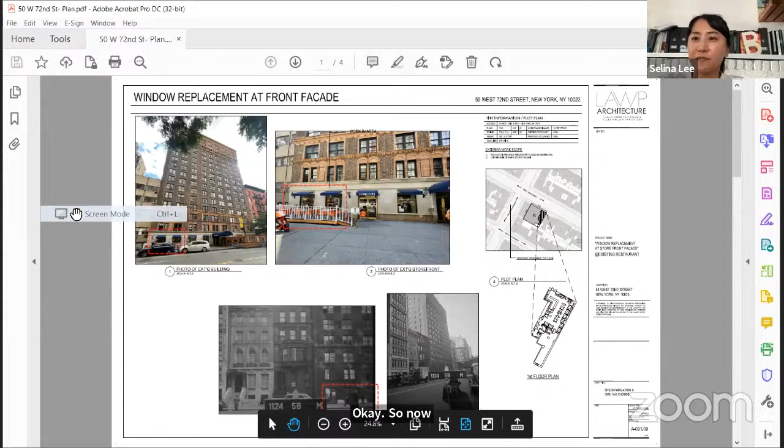So now I'm in control of the drawings. Shall we start? Please. Okay, greetings, dear board members. I am Selina, an architect for the proposed storefront windows at the restaurant on 50 West 72nd Street. The cross street is between Columbus Avenue and Central Park West. It's an honor for me to address you, and on behalf of my colleagues, we are pleased to present a new window design to the Upper West Side.

So please take a look at the entire first page. Could you go to the first page? So when you take a look at the entire building facade, as you can see from the red dotted line, our work scope is the left two windows. These are currently fixed windows, and we would like to replace them with double hung, 4x4 double hung windows.

So could you go to the second page of the drawings? Is there a restaurant there now? Yes, it is open, and you are running the business, but we would like to change the current fixed windows with the double hung windows. So could you take a look at the first drawing, the 1940s tax photo on the first page?

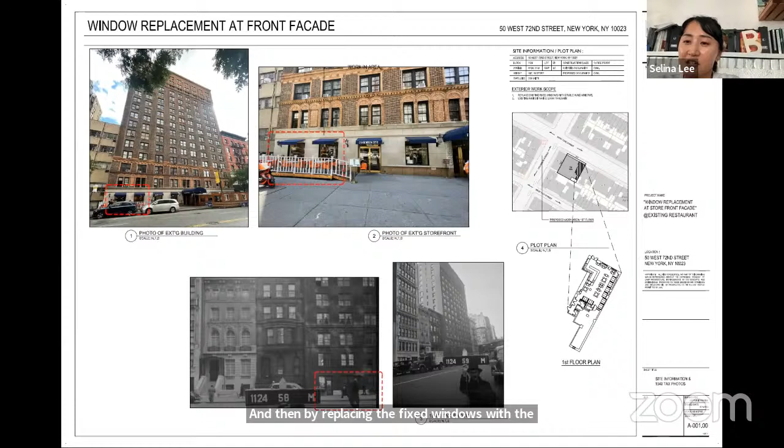Seems very straightforward. By replacing the fixed windows with operational windows, we can make this restaurant more congenial, like a semi-public space, because people can make eye contact. It also improves indoor air quality through natural ventilation. So the 4x4 double hung window we are installing will match the existing 4x4 double hung windows in the building above. It's the same style exactly.

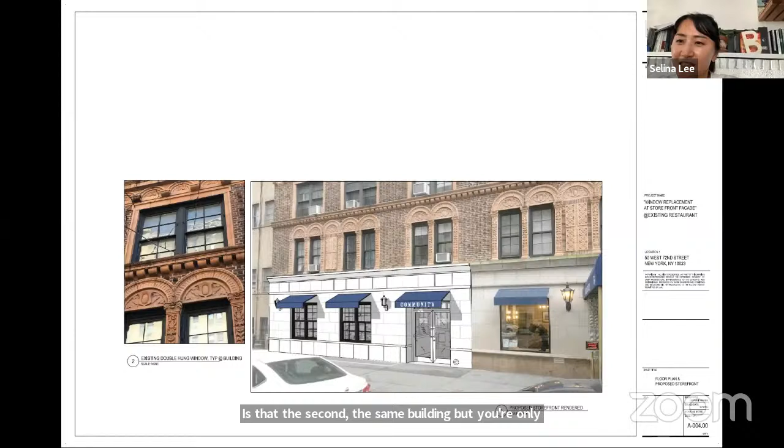Pat, you have a question? My question is, it's just the two windows and the rest of the windows on that floor are not included? Is that the same building, but you're only doing two of the windows and leaving the other? Only our restaurant's. Because the only two windows belong to our restaurant.

Any other board member questions? No, seems like an easy one. Basically we would be making a relatively simple change to return one aspect of the building to what it was originally, and improve the customer experience. So why not?

Jay, do you have anything to say about this, or a question? I agree that it's relatively simple. They're bringing back the windows to be historically accurate. I can't imagine any reason to oppose it, and not to prevent anybody else from commenting, but I would call the question.

We should just see whether anybody from the public has anything to say. But otherwise, I think we've got an easy one here. Any members of the public? If you're a member of the public and you want to speak, please raise your digital hand there. Michelle, I'm not seeing any. Don't see anybody.

All right, so we will take the vote on this resolution to approve a certificate of appropriateness to replace the existing fixed pane windows at this location and this restaurant with 4/4 double hung windows, in effect returning the windows to the original condition they were in, pursuant to the 1940s tax map.

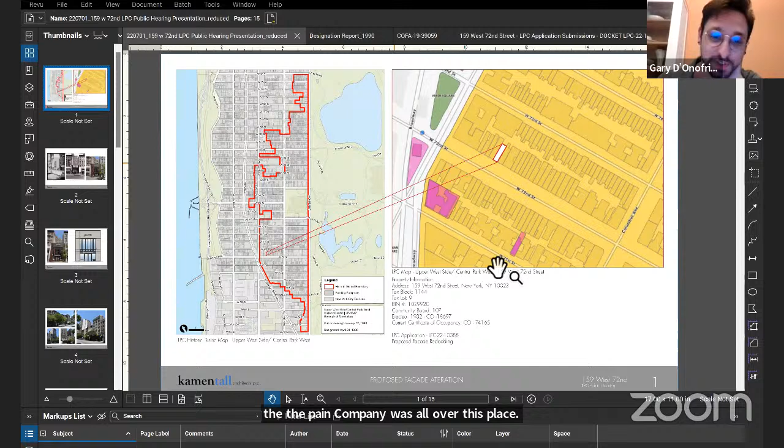Now we're going to be talking about the tiles. Because you had a big, the paint company was all over this place, yeah. Yes, I'll go through more of the pictures so you can see what it looked like through time. So this, sorry, go ahead. No, go ahead if you need to. It's your application.

All right, we're located between Columbus Avenue and Amsterdam Avenue in the district. And this is what we looked like through time.

In 1940, very different look from what was designated. It was an Art Deco building known as Provident Loan Society. Then sometime in the 80s or 70s, I'm not quite sure, they went through a huge overhaul renovation here, and it looks like what it looks like today. They used clay glazed masonry tiles and a huge storefront window, which is still around to this day.

In the previous application, they removed the old sign and wanted to replace all the tiles that were supposedly behind here, but there were no tiles, and those tiles no longer exist. That's why this looks like this today. There's currently no one manufacturing these glazed tiles or any tiles that look like this.

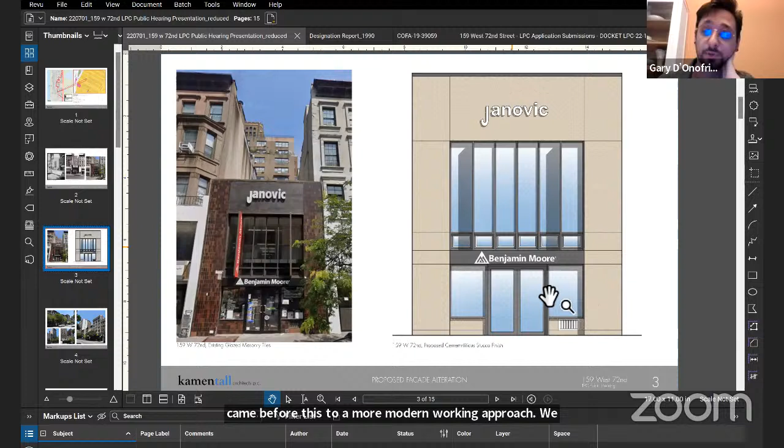So what we are proposing is to try and marry what came before this to a more modern looking approach. We are proposing to remove the tiles and replace it with a cementitious stucco finish. We're going to keep the existing storefront in place, as well as the existing approved signage. I believe it kind of fits in with the neighborhood, which I'll get into.

The whole street is kind of eclectic in style, some very ornate buildings and some very simple buildings, as you can see. I believe it fits in if we stucco the building, as the adjacent buildings, 161 and 163, both have an EIFS stucco finish and a regular stucco finish, respectively. This is just a map.

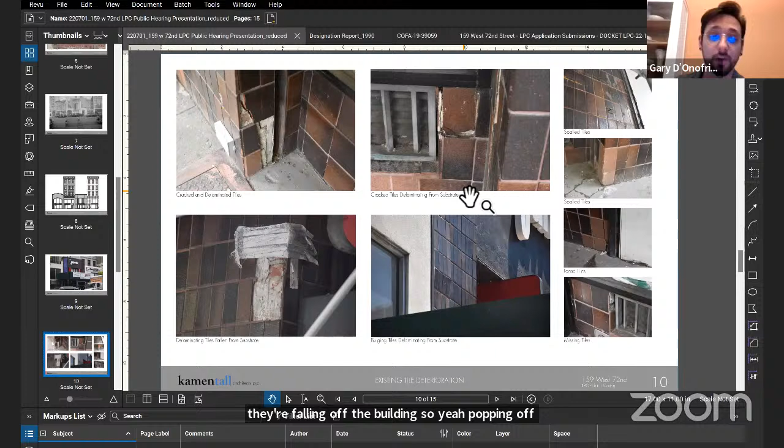The reason why we want to remove the tiles is, as you can see, and I'm sure you all know, there's a shed up right now. These tiles have been degraded and they're falling off the building. They're popping off, they're starting to bulge, and they're no longer adhering to the masonry backup. We don't believe that installing different tiles will be a good enough solution. We fear that they will fall off as well.

So that's why we want to remove them and get this through quickly so that we can remove the shed. The client wishes to use stucco, as I've said, and we're trying to marry it in with the neighboring buildings and also get rid of these unsafe conditions and get rid of the shed, as it's costing the client money to keep the shed up, and it's also disrupting business. It's creating a dark environment for the store and for the neighborhood.

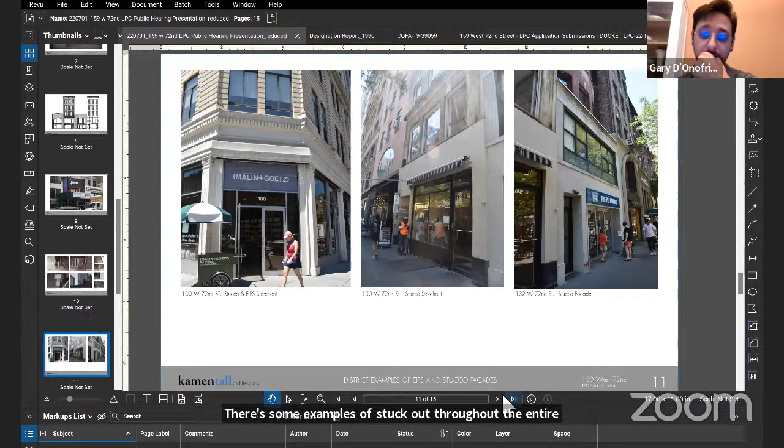There are some examples of stucco throughout the entire district. It's fairly common. If you go down Columbus Avenue and Amsterdam Avenue, as well as some stores on 72nd Street, you will find many stucco finishes.

So what we're proposing to do is remove all the tiles in their entirety, replace the metal coping at the top, and then just replace everything with a stucco finish with some joints to give it some aesthetic. That's simply what we're proposing to do. I would love to hear your thoughts.

Are you keeping the blade signs also? Yes, we're going to remove them temporarily as they were already approved by LPC, and once the building's restuccoed, we're going to put them back. This one's actually attached to the storefront, so it doesn't have to move at all.

I have a question. What is the maintenance on the stucco? Does it get painted periodically? As it gets dirty or whatever, how is it maintained over the years?

Yes, it will be painted over the years. The paint color chosen is Wheeling Neutral, an off-white beige color, which blends in with the adjacent building.

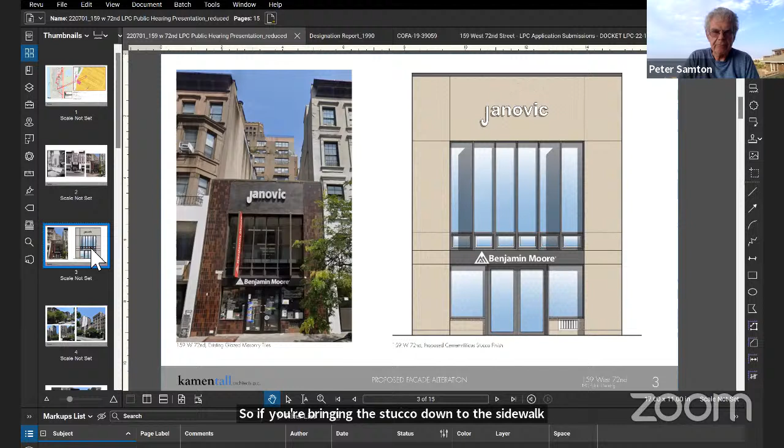Can I say something? Stucco at street level is not a very good idea because it's very easy to destroy. So bringing the stucco down to the sidewalk isn't so great. Well, EIFS is actually more damaging because it's styrofoam. We're not proposing that here. This is going to be cement, Portland cement with lime.

So it's actually much sturdier than EIFS. It's going to be adhered directly to the masonry. Yeah, but...

I've seen stucco applied on quite a few surfaces. There's one on 88th Street near Amsterdam Avenue, at the base of some public housing, put in about 5 years ago, and it's completely damaged now. People put holes right in it.

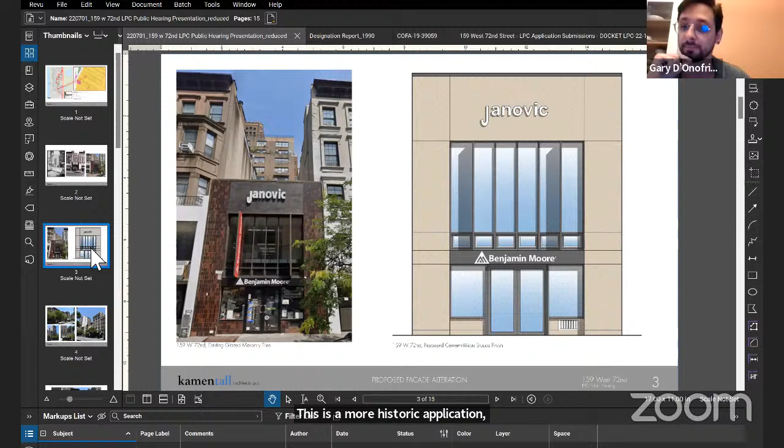They take a screwdriver or something and knock a hole right into the stucco. If there's a hole in it, it's likely EIFS, which is only about a 1/8 inch application over styrofoam. That will likely get a hole in it. This is almost an inch of cement — a more historic application. What you're referring to is the more modernized, cheaper option of stucco.

Could I jump in? On this, Michelle? Okay, thanks. I think the color is appropriate, and the closer you can get it to the other Art Deco-y looking building at 163, so much the better. I'm no big fan of stucco either, but I understand the need for it here.

Stucco often has different surface feels. Sometimes it can be almost like sandpaper, sometimes fairly smooth, almost like limestone. For an application like this, going down to street level and trying to blend in with the street, the smoother you can make it, the more it'll blend in and be appropriate. Can you comment on that?

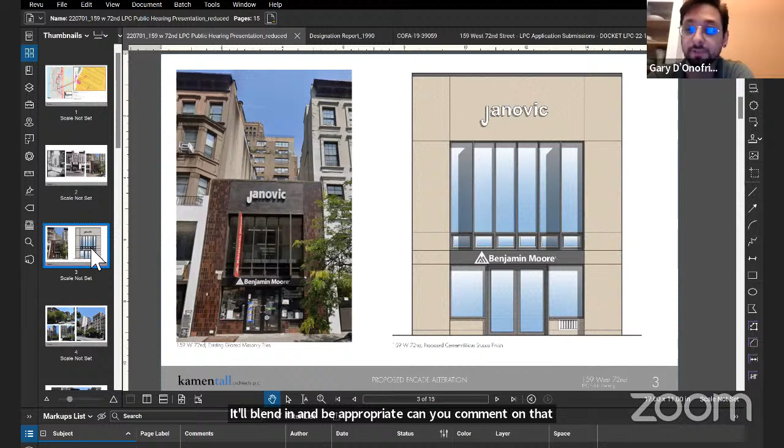Agreed. We would prefer, and the client would prefer, a smoother application as well. It would probably be easier to paint too if it were smoother. Yes. All right, they have a lot of paint. Oh yeah, they definitely know paint.

Anybody else have a question on the committee? I think we should have a resolution to approve, and we're aiming for an 8 o'clock deadline tonight too. But I want to ask, are there any non-committee board members or community members who want to pose a question? No? Okay, let's proceed. Maybe you can stop sharing the screen now.

Sure. The question is called for a resolution to approve the certificate of appropriateness to replace the current storefront with a smooth stucco.

And that's it — you're keeping the blade signs. You're keeping the sign, not removing the sign in the middle of the building. And...

All right, I'm going to ask for your vote. Kay? I'm in favor. Me as well. Jay? Yes. Thank you. Josh is not here, and Paige, you're not here yet. Mark? I'm here. I'm sorry, yes, I vote yes. Clary? Oh, yes, Sue has joined us as well. Susan has joined us. Okay. Yes, I'm a yes. Madge? Yes. Thank you. Peter? Yes. Thank you. And Sue?

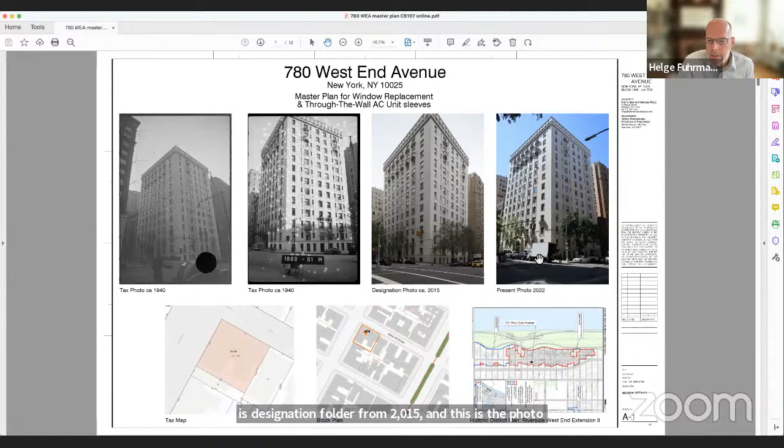This is the designation photo from 2015, and this is the photo of how it currently is. Since the designation, nothing has changed as far as I could see. Here's a closer up of the tax photo and the current conditions. You can see that currently all windows are 1/1.

Some of them are mulled together because the windows are relatively wide. So the owners decided to go with a cheaper option, mulling two together, which creates a somewhat different look. In the 1940s, you can see that the two street facades had different types of windows with muntins, divided lights. The smaller ones had just one vertical muntin, making a 2/2 window. The wider ones had two muntin locations, creating a 3/3 window, but they are still very small.

In the overall impression of the building, I think they did not stick out so much, they were barely visible. So what we are proposing—this is other views, along the 98th Street side where one can see only the side of the building barely. And this is just the corner impression with the 1/1 windows and some of the mulled together windows. Here, view up north on West End Avenue.

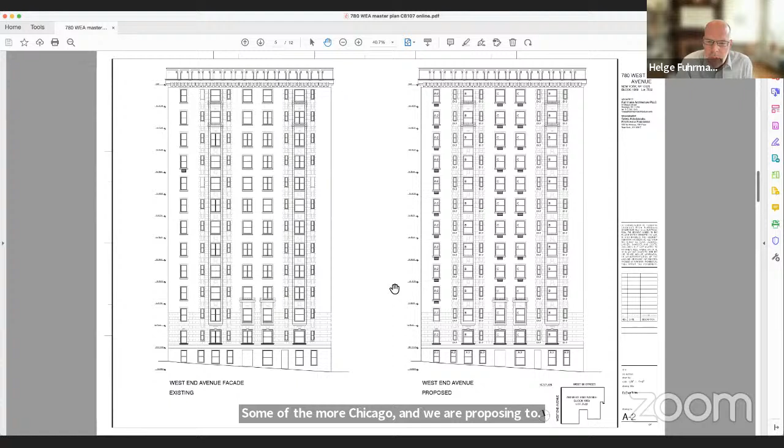So these are the West End Avenue facade as it is existing on the left. It's all 1/1 windows, some of them mulled together. We are proposing to replace them all with the master plan with 1/1 windows, all just 1/1 windows, no mulled together windows, to create a more uniform look on the West End Avenue facade. We're just clicking through the facades now. This is the 98th Street facade. Again, it will be one uniform look on the facade.

Then the same—these are the courtyard facades, where we would like to keep some of these mulled together windows. I should go back, because we're also proposing the through-the-wall AC sleeves only in locations where there's plain brick, not where there's decorative limestone around the window. On the West End Avenue facade, it's actually just three locations. On the 98th Street facade, it's only one row where we are proposing it, because on the front here, that's the corner, the window around the corner seems to be better suited for it.

This is the courtyards, again with the uniform windows and through-the-wall window sleeves. Same here, same on this facade. So this is the standard elevations of the street facade windows.

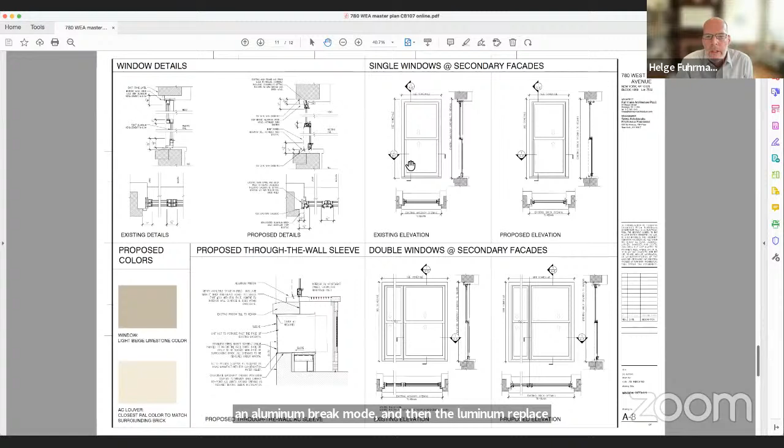I'm showing here the one historic window in the courtyard that still had the beaded brick mold. That's what we are proposing to replicate here with an aluminum brick mold, and then the aluminum replacement windows that go with it. These are just 1/1 windows in the secondary courtyard facades.

This is a detail for the through-the-wall AC sleeves. The face of the grill will be flush with the face of the brick, and the colors of the windows and of the AC sleeve will be a light limestone color, similar to the actual limestone around the windows, and then a light color also for the AC louver to match the brick.

The last page is showing historic and the current photo.

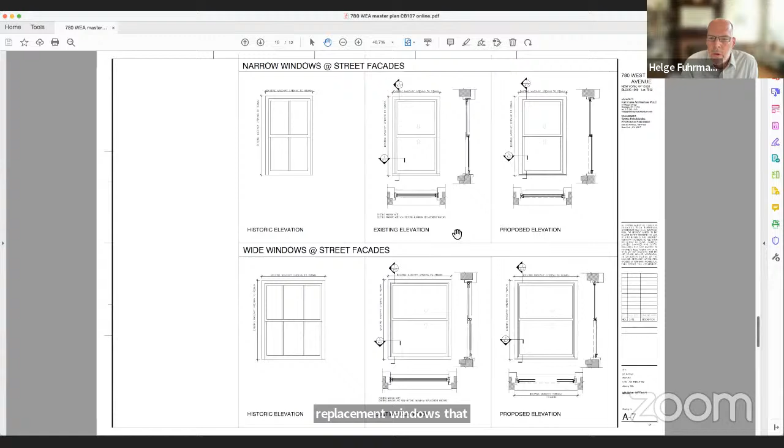Existing are all aluminum replacement windows that are currently 1/1. Some of them are also replacement aluminum windows, but they were just mulled together, two different windows in one opening. So that is a completely non-historical situation.

Just go back to the photos, so here you can see it, it's one double-hung window and another double-hung window that are mulled together. Okay, so that's my first question, are they separate windows? Yes, they are separate windows, all non-historic.

Well, okay, but the two separate windows which give the appearance of 2/2, was that the historic configuration? That's what I'm trying to figure out. No, the historic configuration for these wider windows was the 3/3 that had two vertical bars. Oh, okay, okay, thank you.

Mark, you have a question? Question and a comment too, I guess. So the existing windows are replacement aluminum, whatever the configuration, they're all currently aluminum? Yes, they're all replacement aluminum with aluminum panning. Okay.

I noticed that the proposal for the air conditioning sleeves, I'm pleased that you are not proposing to put them in the more decorated columns of windows, but they don't seem to be symmetrically arranged on either of the two primary facades. You've got them on some, but not all of the windows on West End Avenue. It doesn't go all the way down to the ground floor. And on 98th Street as well, if I remember correctly, it's just the eastern column of windows, and again doesn't go all the way down.

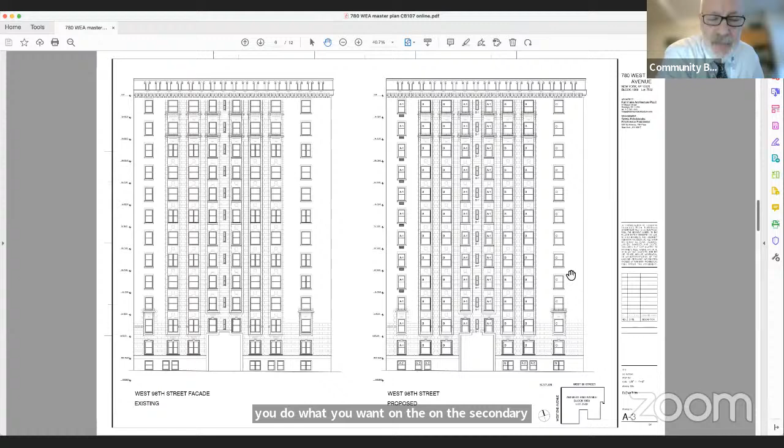You've explained to Jay's question adequately why it appears as though there's divided light windows, but there really aren't. I guess my comment is that I agree with Jay that the standard for this ought to include the level of detail and ornamentation on the primary facades. I'm happy to let you do what you want on the secondary facades. And I think this building qualifies with just enough, maybe barely enough, but just enough original detail in order to replace the glazing with the 1/1.

So I would favor that, but the same analysis leads me to be very concerned about the through-the-wall sleeves, precisely because it's that ornamentation that you would be interrupting if you made it symmetrical, and not to make it symmetrical is a problem for me. So I think I'm splitting my vote here and supporting the 1/1, but opposing the sleeves. That's where I am right now. I'm happy to listen to my colleagues. Thanks.

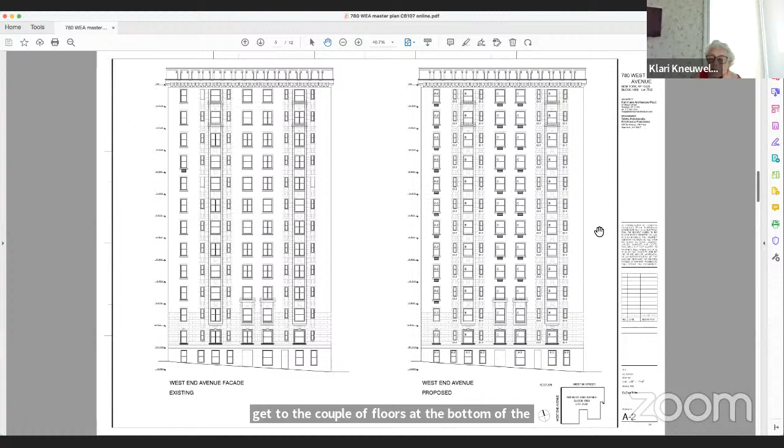And I respect that as they get to the couple of floors at the bottom of the building, they are not proposing to do this because there's the limestone facing there. So I personally think they've about optimized what they're doing here, and applaud that there is going to be a master plan, and I would go for the whole thing.

Okay, thank you. Anybody else? Jay, your hand's still up, but I assume you've said your piece, yes? I don't know if Page has to be admitted.

I'm on it. Panelist. Great. Could you help us out, Mark? And we'll ask her if she has something to say. Can you admit her, Mark? Thank you. She should be able to unmute herself now. Great. I'm done. Hi, Page.

What a marathon. Thank you, I've been listening for about the last 10 or 15 minutes about this. The problem I have with this building is, and buildings like it, the master plan really should set in motion something that is going to be permanent and lasting and appropriate for the building.

And when I look at the proposed window design and where the buttons go, it looks, I hate to say it, and I'm sure it's going to be as expensive as hell, but I would go the extra nine yards and put back the original windows. You're going to all this trouble to do this, and it makes the building look the way it should look with the divided light. So right now I'm sitting on the fence and I don't think I can support the application as is.

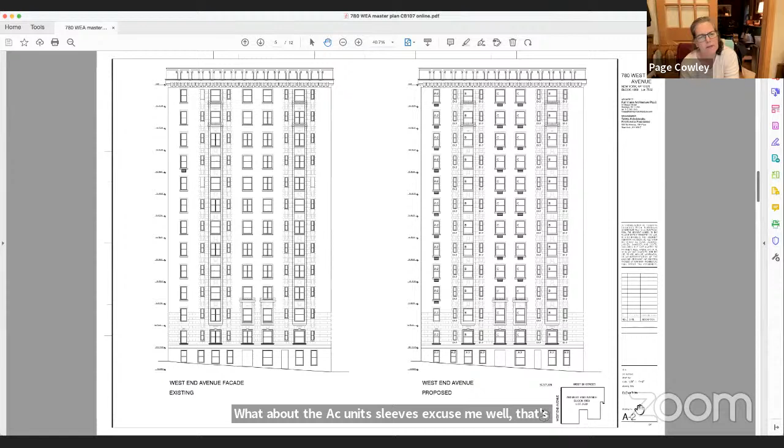What about the AC units, sleeves, excuse me? Well, that's another issue too. If you put the AC units underneath a full restoration and it's done well and it all looks the same, then it will fit because now you have good windows and an alteration that brings the building up to a higher livable standard.

Right. Okay, Susan? I agree with Page. Jay, did you want to say something again? Yes. Okay, and then Madge.

I had a question. With the master plan being proposed, is the building requiring replacement of windows, or is it going to be bit by bit, depending on the individual? I assume this is a co-op. Is that correct? Yes. So it's going to be up to the individual shareholders, but there's no requirement that windows be replaced, is that correct? Yeah, I don't think there will be a requirement.

So then my comment, we've dealt with this before, is that if there was going to be a mass or complete replacement of the windows, I would agree with Page.

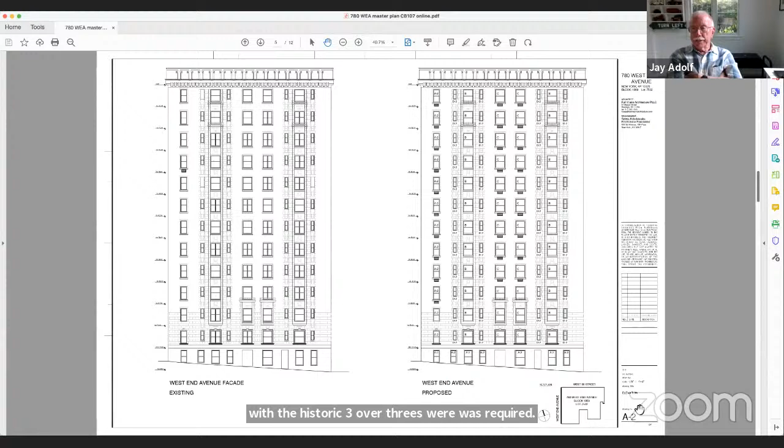What's likely to happen is, even if someone decided to replace the windows with the historic 3/3s, or it was required, it's literally going to be generations, if at all, before all of the windows are replaced. So we go from a hodgepodge of 2 different types of windows to a hodgepodge of 3 different types of windows. We generally prefer the historic configuration, but I don't think 1/1s, and modernizing the facade with air conditioning sleeves, is inappropriate. It may not be most desirable, but I prefer consistency in the appearance of these buildings than generations more of a hodgepodge of windows.

So while I'm not excited about it, I think I can support the application as is.

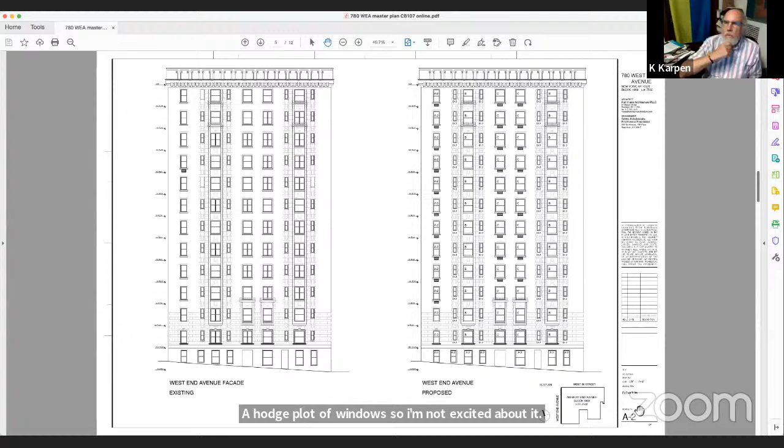I don't agree with Jay, because I think you have to start somewhere if you're going to have a master plan, even though you can't make everybody do it right away. My question is, did we ever see a historic picture of what the 3/3 actually looked like?

Mr. Fuhrmann, could you stop sharing your screen, please? Sure, I think I can help. Just a minute, now I'm zooming in a little bit here. Okay, oh great, I see. So these are the same windows that Mr. Fuhrmann was just referring to. Correct, but I think you can see what it looked like before. All right, yep, okay. Yeah, thanks, Mark.

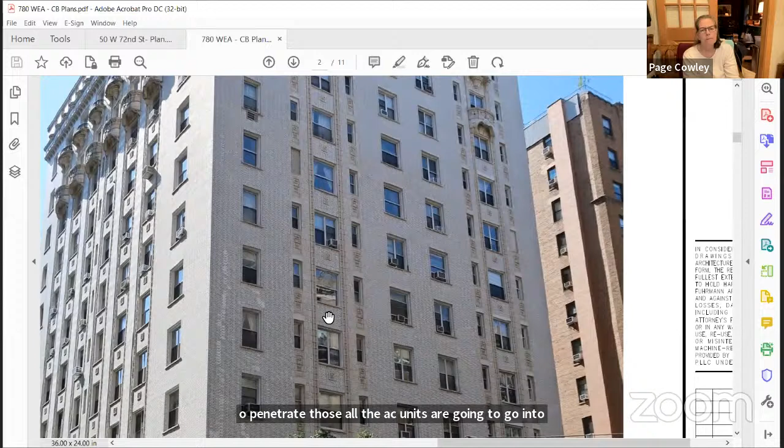I think the only other thing that concerns me, this view shows medallions underneath the windows. I didn't see them in the original picture, I mean the current photo. So I would be sad. I just hope they're not going to penetrate those. All the AC units are going to go into unmedallioned openings. They are, okay. That's what the applicant said, Page, I believe, right? Okay, well, you've got 50% of my vote. Excellent, thank you.

So back to the medallions, we just go back to the existing windows or existing photo. We are not replacing any AC sleeves in those locations, only in this window on the very left corner, and then the two center windows, where that AC sleeve is, between those two vertical bands with the limestone, exactly to not touch the more ornamental limestone areas. So the windows or AC sleeves will only go where there's plain brick.

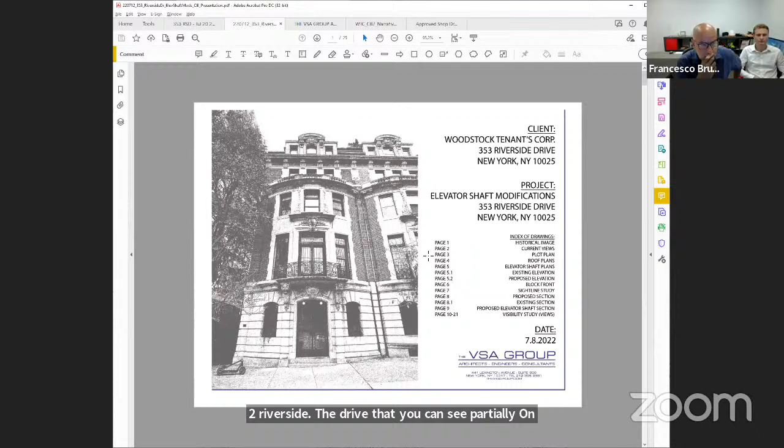Okay, so 353 Riverside Drive. This property has a sister building to the south, 352 Riverside Drive, which you can see partially on this introduction photograph. It's a 5-story property, and the scope of work is on the main roof.

Excuse me, sir, is it possible to make the pictures larger? I can enlarge my screen. Were you requesting this main one to be larger, or the smaller one on the side? Mark, can you help out here? That's helpful.

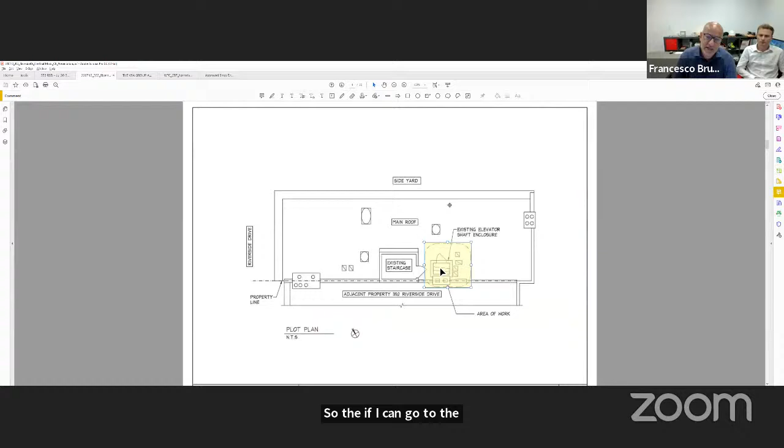So if I can go to the next page, there is an existing bulkhead.

I have something on my screen that says one or more updates are available. Can you just hit remind me later? I think that's you. Oh yeah, sorry, I didn't recognize that. We promise to remind you later, Michele. Thanks, sorry. Along with your car insurance.

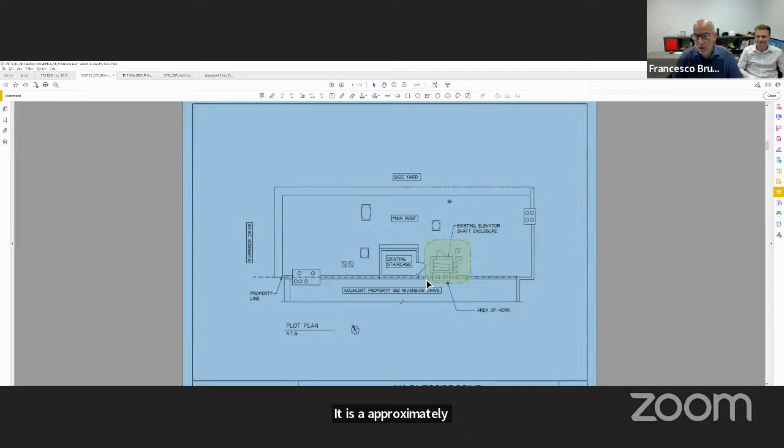So the existing elevator shaft sits approximately 40 feet back from the street facade. It's an approximately 8-foot-tall bulkhead - this is the existing elevator shaft, which has only a door accessing the existing gears. Behind the existing elevator shaft there is a 23-foot-tall brick chimney shared with the southern property, 352 Riverside Drive. There is a party wall between the two properties at the property line.

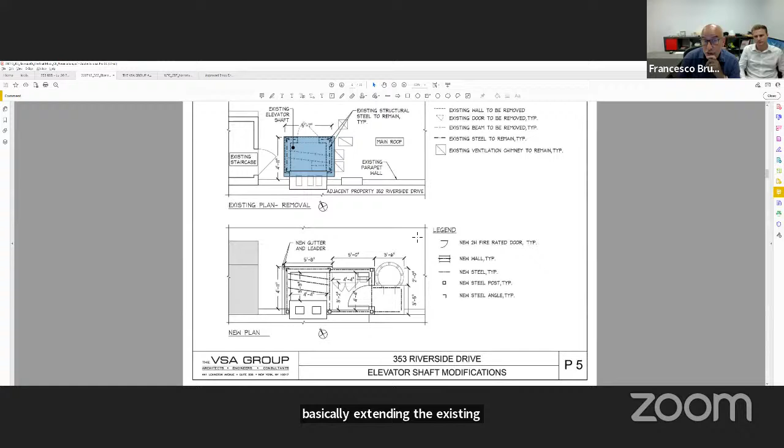So the proposed scope entails extending the existing elevator shaft to reach approximately the height of the brick chimney in the back. A similar extension of the elevator shaft was already implemented on the southern side of the chimney, so what the ownership is aiming to achieve reflects what's on the other side of the property line. The proposed scope will extend this existing bulkhead up to approximately this level - a total of 23 feet.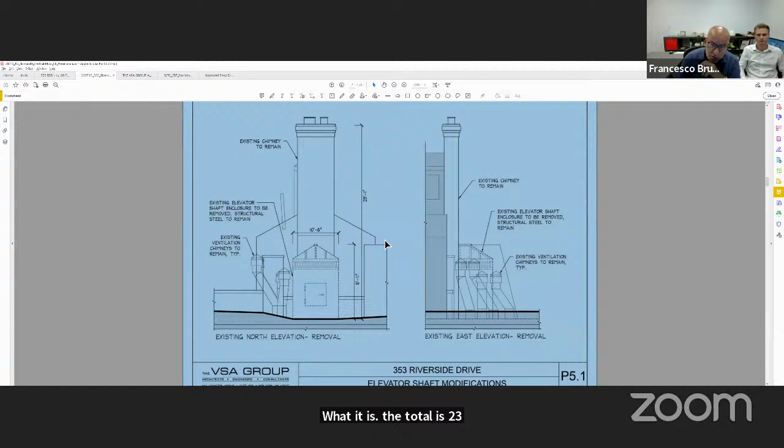The reason we found ourselves within this dimensional constraint is because of extensive conversations with an elevator company retained to prepare the shop drawings for this scope of work. Those shop drawings required a minimum vertical height of 8 feet for the elevator car to arrive at the roof, plus an additional 7 feet for the elevator machine room on top of it.

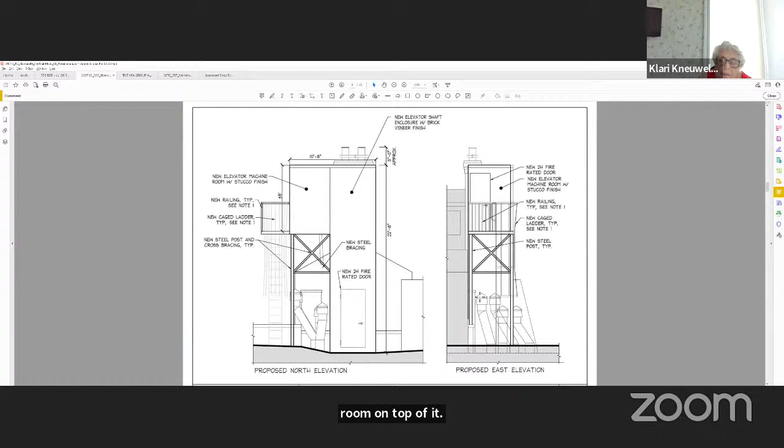Did you say that the neighboring twin building to the south, 352, already has an elevator shaft that extends as high as the chimney? Yes, that's correct - you can see it partially on this side view.

If I go quickly through this - unfortunately it's a little bit grayed out, but this is pretty much the proposed elevator modification in terms of volume on the 353 side, and this is the existing one on the 352 side, on the south side of that chimney.

Do you have photos from a public way that show us what is seen from opposite, from the park currently? Yes, that'll help us today. I'm going to scroll quickly, and then eventually we can come back to these technical views.

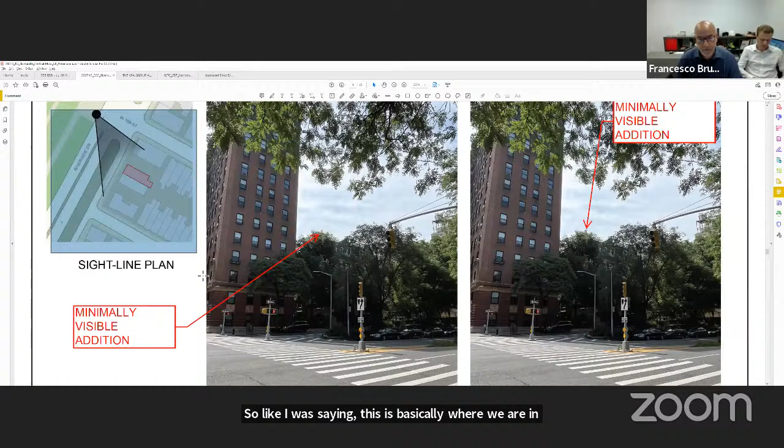So like I was saying, this is basically where we are in terms of key plan. We have prepared the mock-up of this proposed bulkhead, and you will see this is basically the tip of the chimneys visible.

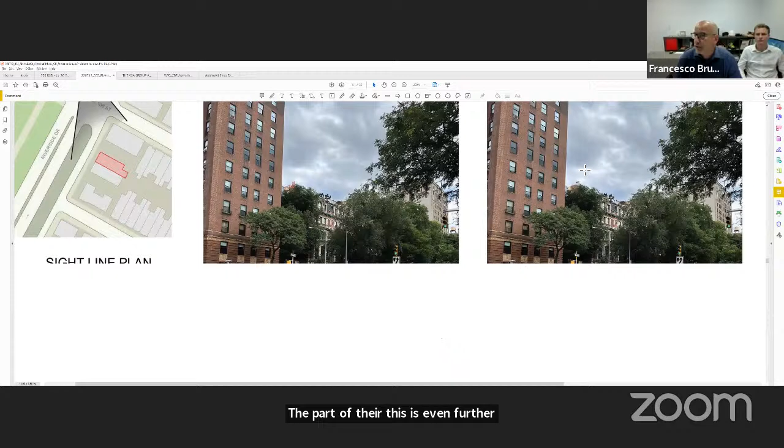From far away, from approximately 108th Street, but on the Riverside Drive side - this is even further away. This is a rendering of what we are proposing, so you will see that it will be minimally visible from very far away.

We are proposing, and we are open for discussion, to use finishes that blend this volume within the same material fabric of the urban landscape that is surrounding it. And I have a view from the roof side, which I am going to show.

Okay, this is again from the river side. And this is from the southwest corner on 107th Street.

So the orange netting that you see here is basically the mock-up. In a second you will see it from the roof side. So you see the existing brick.

Unfortunately the resolution is not the greatest. You see the existing chimney in the red brick, the stucco finish of the existing extension on the 352 Street side, and what you see in the back here is the orange netting of the proposed mock-up with the extension.

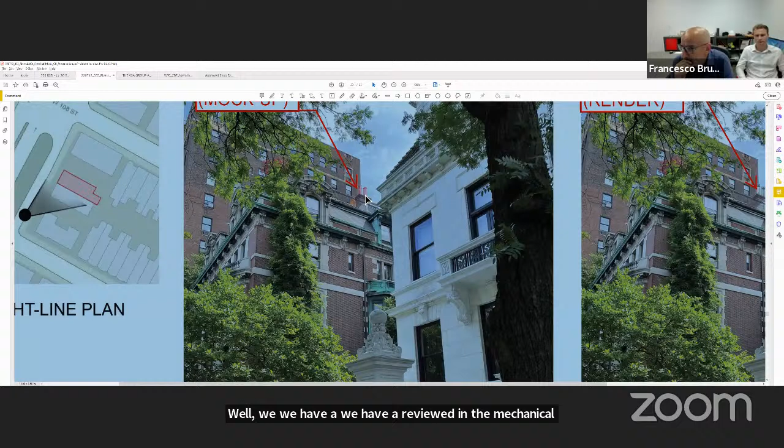So what are those two things sticking up on top? Well, we have reviewed the mechanical code, and based on the mechanical code, the chimney must extend 3 feet minimum above any surrounding structure within 10 feet of horizontal distance. So you also have two chimney extensions on top of the existing chimney? Correct. Okay, that was not clear at all.

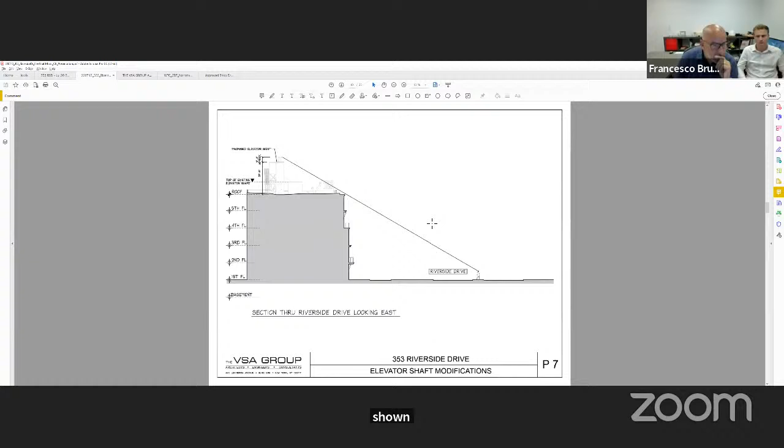Yeah, I was going to get to that - thanks for bringing that up right away. This is part of the extension. So if I go quickly back to the CAD drawings, that will be shown on this - where do we have that, Caetano? This one here, the approximately 3 feet extension over the proposed new elevator shaft. Going back to the roof, I was going to show you the views from the roof level.

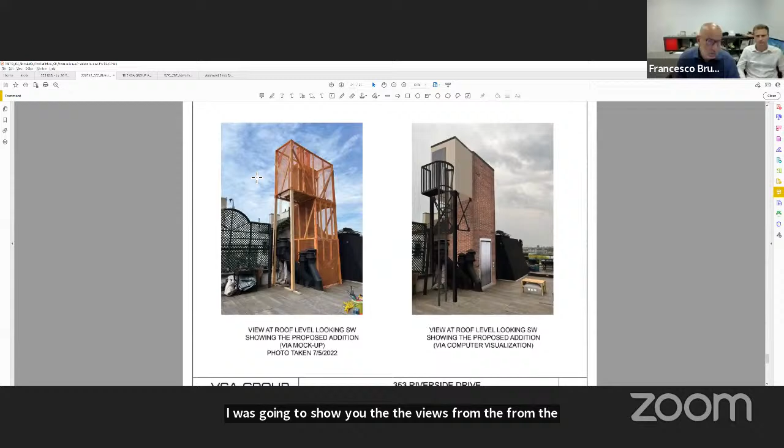So this is the mock-up of the proposed volume. You see behind the orange netting, you see the chimney, you see the existing elevator in the back. So on the right side, you can see the proposed finishes that we have indicated on this presentation.

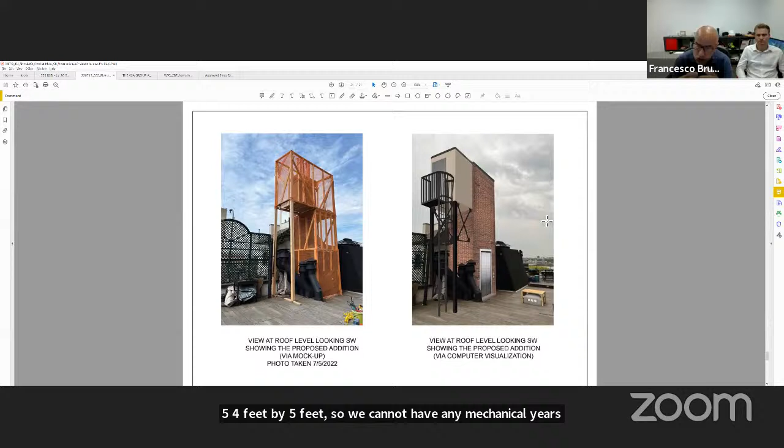So emphasizing the verticality of this shaft using the same material, the historical material of the chimney and the surrounding building, and having the elevator machine room, which cannot be part of the shaft because the shaft is only 4 feet by 5 feet, so it cannot have any mechanical gears in it - everything had to be brought outside.

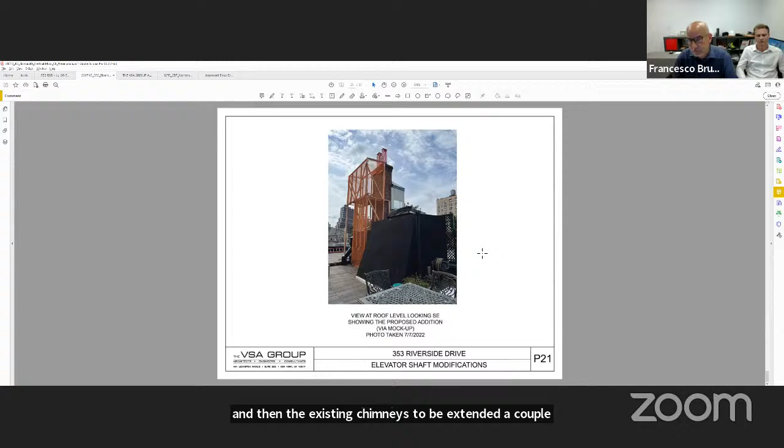And then the existing chimneys to be extended a couple of feet over the existing. Because right now, although you don't see them here on this photo because of the perspective, there is like a foot of the existing chimney, so we will raise them another 2 feet, most likely, from the existing elevation.

What makes us feel confident about this presentation is that yes, we are aware there is a volume that will be added to the building, but visually, especially from the primary facade side, the impact seems to be minimal. Of course, I'm going to leave it up to you experts, and I look forward to hearing your feedback. But this view does seem to confirm that being recessed helped from the primary facade.

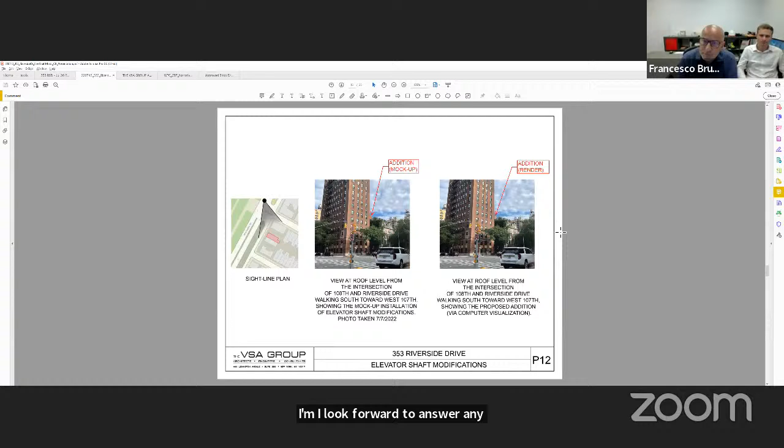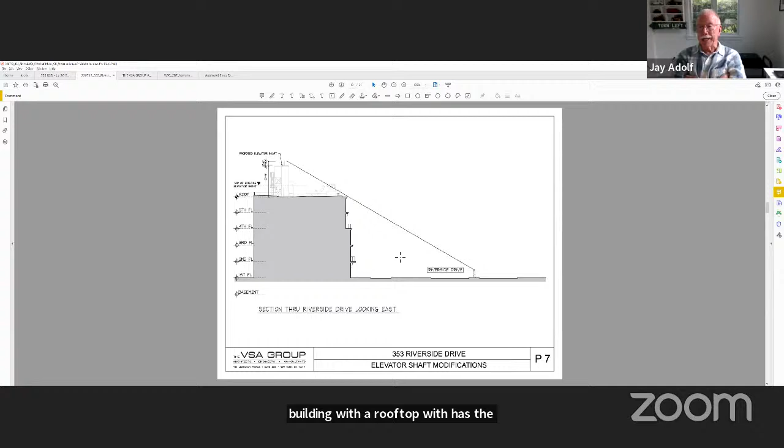Jay: Yeah, I just want to be brief. Is it ideal? No, but I think it's substantially mitigated by the fact that it's backing up to a twin next door. Considering the height, it's about as minimally visible as it could be. And frankly, I think we have to consider the fact that you cannot have a 5-story building with a rooftop with, as the presenter said, some elderly residents not having an elevator. If this is what it takes to comply with the code, I think it's acceptable enough that I can support it.

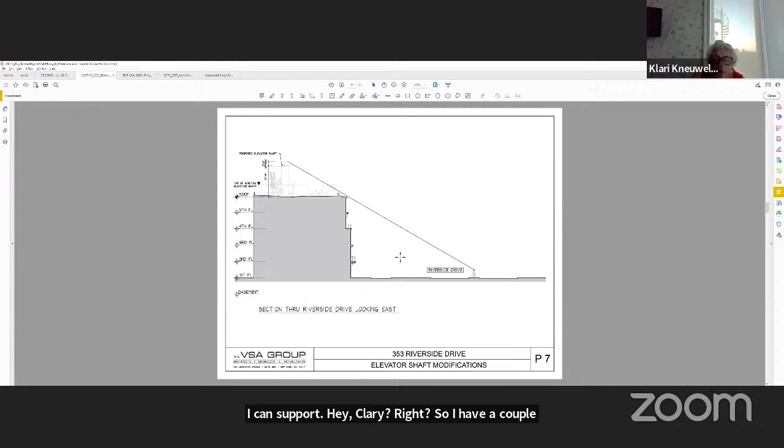Klari: Okay, so I have a couple questions first. Is this a multiple dwelling? Multiple apartments? To my knowledge, this is a co-op with one apartment per floor. Okay, right, two apartments per floor, 10 units.

Thanks. So the purpose of the extension of the elevator bulkhead is to have the elevator not just serve, the elevator currently serves the top floor, is that right? But you want it to serve the roof, is that right? The existing elevator, which is no longer existing because it's been removed for two years, was going up to the 5th floor. So it's not as if there was a floor that didn't have an elevator accessing it. This additional height would be in order to have the elevator also go up so one could step out onto the roof, as it does on the adjacent twin building.

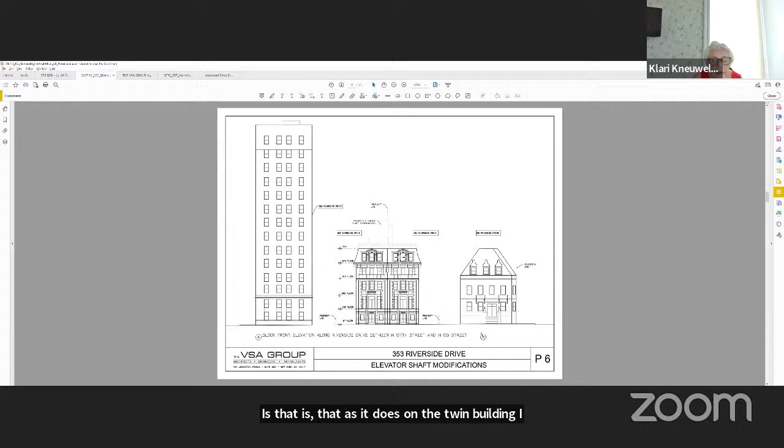Right, I understand that. So it's not as if you're giving people an elevator to reach their apartments that they didn't have before. I would also note that the visibility in the mock-up is shown with trees because it's summertime. You've done the right thing, you've made the mock-up, you've taken the photos, but it could be considerably more visible when the trees are not in leaf. I think it's kind of borderline for me because I don't see a strong motivation, and I haven't heard a strong motivation to get people up and out to the roof in this particular building. These are really very spectacularly elegant buildings, and functionally, people with a new elevator that is as high and goes as high as the prior now-dead elevator, everybody's going to get to their apartments. We haven't heard anything about a roof deck or a roof garden or any functional use of the roof that would require that, or that would be the rationale for extending the elevator upward by a floor and then having this whole new bulkhead.

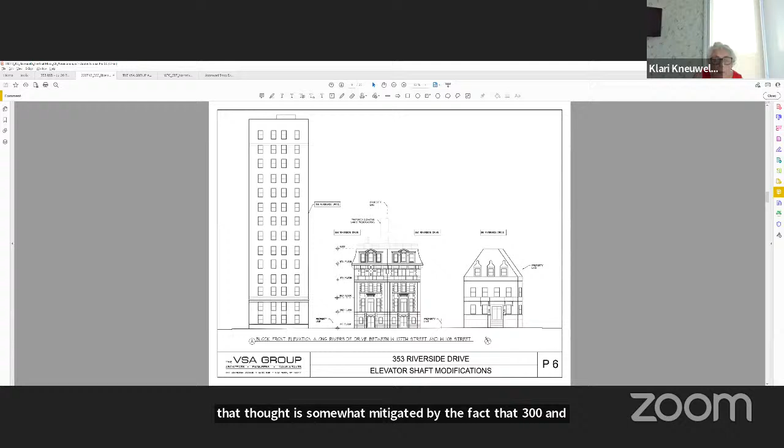I do tend to agree with Jay, however, that argument is somewhat mitigated by the fact that 352 already is up there. So I'm kind of borderline. With my questions answered, I'm not sure where I'll go. I want to hear what other people have to say.

May I respond, as president of the board? The roof amenity is treasured because of the views, and everybody in the past has made as much use of it as possible. That said, the stairs from the 5th floor are becoming difficult for some. I think the design and the capability of going to the roof was inspired by the adjacent property, which does the same. Thank you.

Paige: Yeah, I've been looking up the designation and learning more about the building.

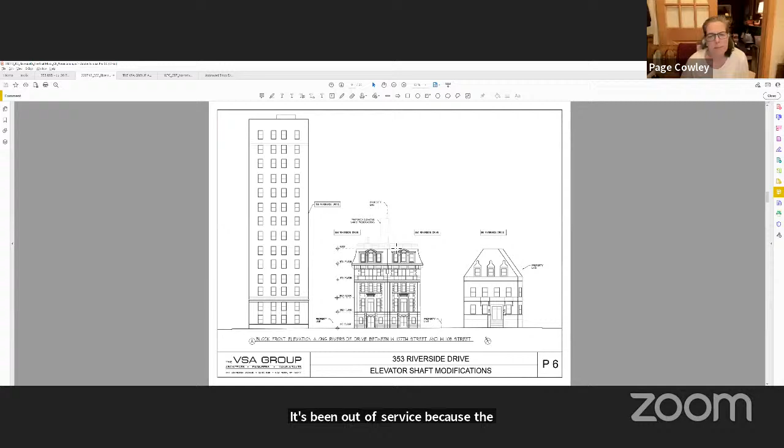Can you go back? I have three questions first. Currently, there is an elevator that serves all 5 floors. It's been out of service because the equipment failed, but you're putting it back in the same shaft that was there before. Correct. Okay, so that minimizes the disturbance, because I understand there are 10 apartments in this building, front and back. Okay, so now we can jump to your presentation. Could you show the elevation of what you're proposing it up against? There we go. My question is this.

Why is it jacked up so high? Because with current elevators, the elevator machine room can be located adjacent to the top floor with a small overrun. And when you mentioned, I think my colleague's request was how tall is it? And you said 23 feet.

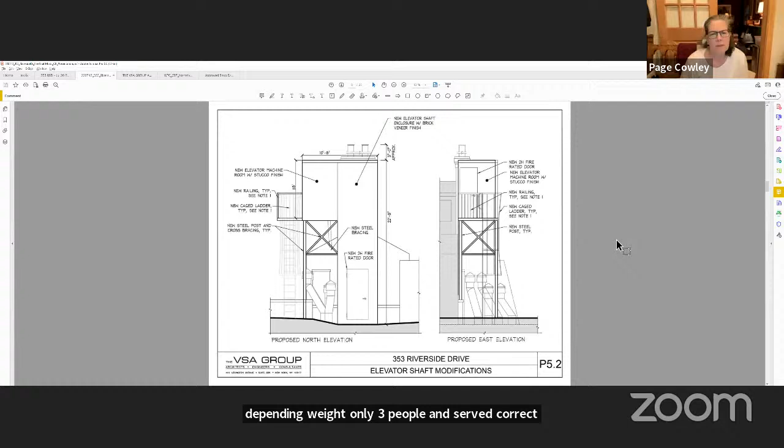That is just air captured in a volume. And then you have this caged ladder for maintenance. I don't understand why this unconventional elevator for brownstones of this small nature, because it's only going to be able to accommodate, depending on weight, maybe 3 people if I remember correctly. This seems like an awful lot of construction for not much improvement to the roof.

The chimneys that are stacked and sloped, it's not a very habitable or inviting environment. Anyway, my last comment is I really don't understand why you need a 22 foot 8 inch overrun for the top of the elevator for this building. I'm assuming it's traction.

So what has to happen is the machine has to sit in the shaft above the top of the car. And the minimum clearance requirement from the landing of that topmost floor to get clearance to the bottom of the machine, basically the floor where you're servicing the machine, is some 13 feet. And the machine room provides access from the rear to that machine so that it can be maintained. That's why it has to be at that height in this case.

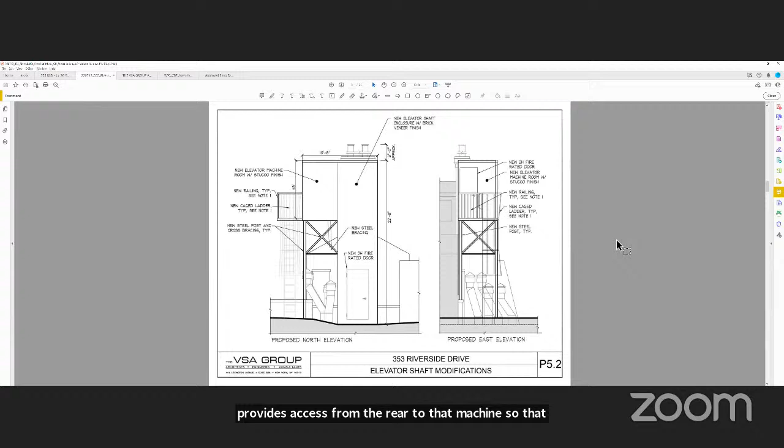The other thing worth noting is the spatial constraints are so unforgiving that there are obstacles to the west, to the north, and even to the east. But by having the machine room high, we clear the obstacle to the east and we mitigate the problems of visibility and appearance because it's further to the rear of the building. So this intrudes as little as possible onto the roof deck, and we think preserves the enjoyment of the roof deck.

Well, you brought up another point, the chimneys that are stacked and sloped that pass underneath, are they still active chimneys? Those are active air vents, and they're actually attached at the joist under the roof and the ceiling below. Yes, they're active. And those are bathroom vents, right Joel, if I remember correctly? And the Department of Buildings is aware of that, with the construction over the top of them?

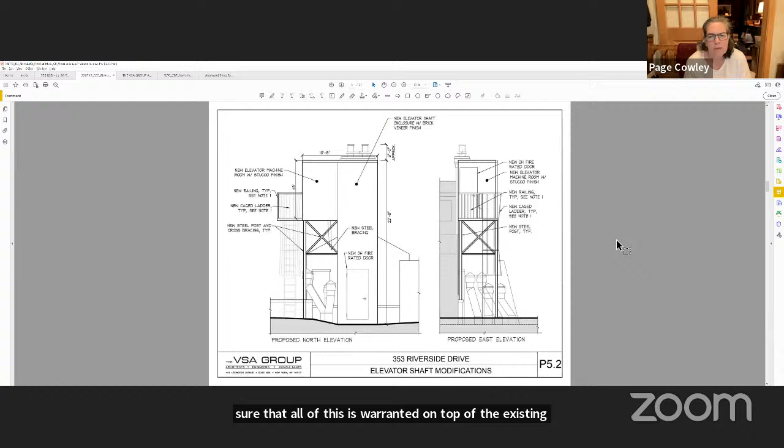I know this is a landmarks issue, but I'm just surprised. I appreciate the gymnastics that you've gone through to make a bad situation better, but I'm not sure that all of this is warranted on top of the existing building. I've been reading more about it, and the other building is pristine in terms of just very simple modifications with no competition in height of adding something that's 23 feet. The other building has, even though it has access to the roof, the machinery is below. Yes.

So it's a tough one for me. I'm not sure I can support this. I would like to see, if you're not pressed for time and urgency, if you could find a better way to not call such attention to this roof. I mean the new railings, the caged ladder, the post, everything up here is alien to, and what is it, a 1909 building. I think it merits a second look. Thank you. Mark?

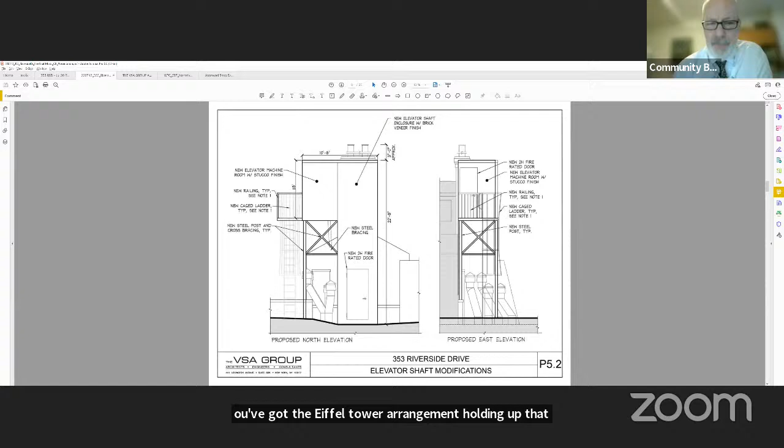Thank you. I now understand why you've got the Eiffel Tower arrangement holding up that mechanical room. I start with the premise that, of course, you should have an elevator for this building, both for ADA purposes and for ease of access to the roof. That makes perfect sense. With the building immediately to the south having a much more modest construction, I'm still not satisfied that the right machinery is being installed if it requires this volume to be added.

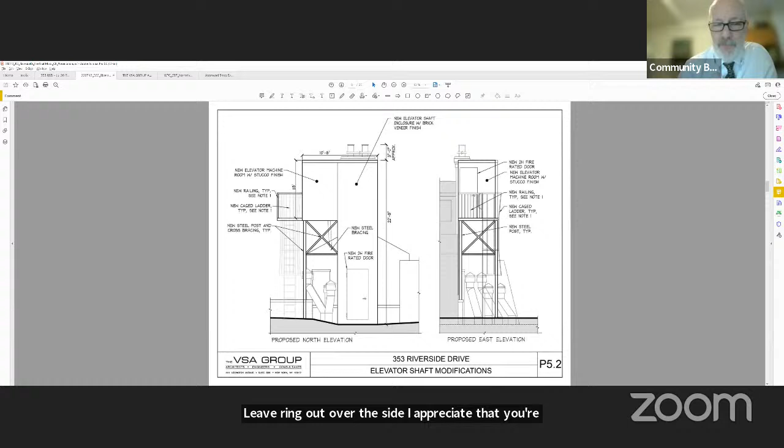So I'm at a loss here. I know we have seen. I have no objection to the elevator overrun per se. 23 feet seems to be way more than you need, given that the answer to a previous question of a colleague was that there was an overrun of 7 or 8 feet required and another 7 feet for something else, which adds up to 15, leaving 8 more that are either unaccounted for or could be the mechanical room that you've got cantilevering out over the side. I appreciate that you're making it cantilever to the east and therefore away from the public view. But both from an appearance standpoint, and after all that's what we're here for, is the appearance of these things, not the mechanics of it per se.

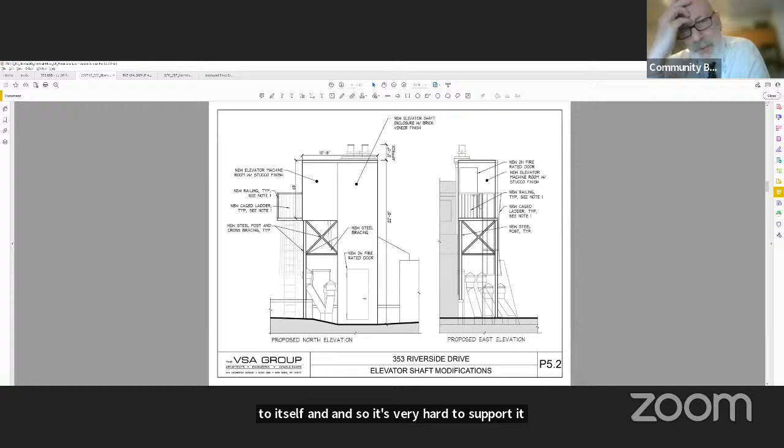But it doesn't look like something that belongs on the roof of such a remarkable building. One of the standards we often apply is whether utilitarian and mechanical equipment on the roof blends in with typical rooftop structures that don't call attention to themselves. I don't think this meets that standard, maybe because it's highlighted in a different color, which I don't understand. But between the metal framing, the Juliet balcony, and the light colored addition hanging off to the side, this does call attention to itself. So it's very hard to support it, especially given the answer to the earlier question of 15 feet somehow becoming 21, 23 feet. Perhaps that's a question, perhaps just a comment, but I want you to have your elevator — I just don't think you're there yet.

Thanks, I can address the questions. The height considerations have to do with the clearance from the landing to the base of the machine. That's actually about 14 feet if the elevator comes to the roof, because of the height of the car. On top of that, the minimum height required by code for the machine room is 7 feet. So that's how we get up that high.

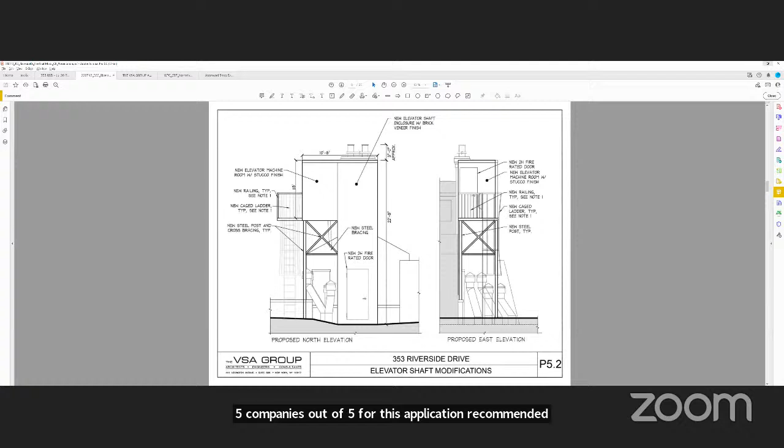We've been through the mill on this, and 5 companies out of 5 for this application recommended the Hollister Whitney gearless baby overhead. The reason is that we cannot accommodate compliantly a basement traction machine, because the cable arrays are too big to fit between the hoistway wall and the car. All I can tell you is that this has been absolutely exhaustive, and the manufacturer makes certain allowance requirements that have to be met in order to service the equipment and operate it properly. It's been a long time coming, and that's why there's been such careful study of this. The work with the general contractor, the elevator contractor, and the manufacturer has been extensive to reduce the allowances to the extent possible.

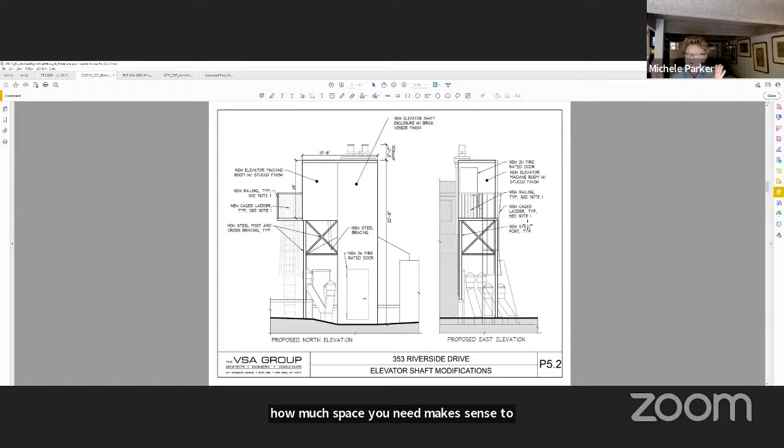I just want to say the elevator in my building acts up often, so I've had about 40 years of looking at elevators and elevator shafts. Your explanation of how much space you need makes sense to me in light of all I've seen in the elevator in our building, which operates a little differently, but I understand by your explanation the space that you need.

I'm pretty sure when people build things, they don't want to waste space. They don't want to pay for one more inch of space than they have to. A designer, a contractor and architect don't want to add one more inch to a structure if they don't have to. So I would vote in favor of this. I might ask that the colors of the exteriors of your units more closely match the other colors in the building next to yours, but that's a call you can make, and maybe even landmarks would bring that up.

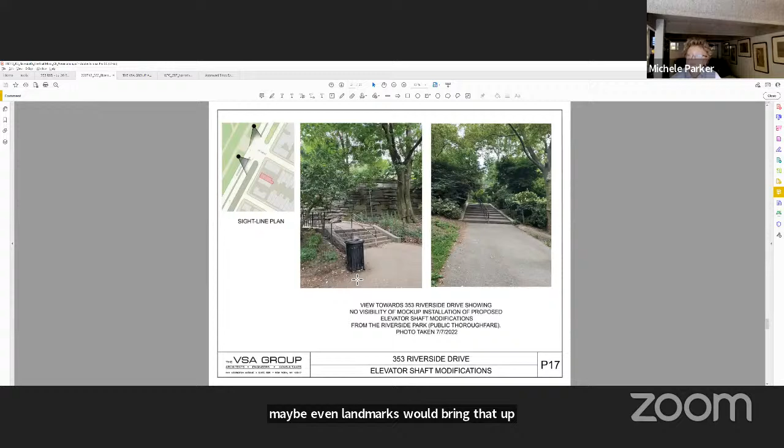Perfect. So I believe everything you're saying about this. I understand all the space that you need to put this particular type of elevator into the shaft. Thank you.

Anybody else have anything to say? Any non-committee board members? Shall we call the question on this? I think you have a hand raised in the community. Shall I promote? Sure, yes, please.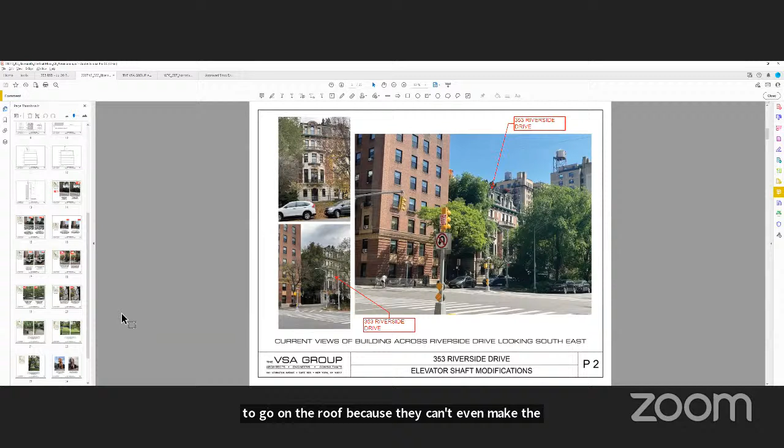And if we don't have access to the roof - I'm 81, I'm in pretty good condition, but it's very difficult for people to get up there. Eventually half the co-op won't be able to go on the roof because they can't even make the narrow winding stairs that goes from the 5th floor to the roof level, if you see what I mean.

So it's not just an amenity, I would say it's a necessity for people who are not going to be so able in the future, and are not now. Some of us have knee and leg problems, and there are at least 3 people in the building who have serious knee and leg problems. So the roof is very important to us.

We've tried to make this addition as attractive as possible, maybe making it all stucco so it's not red brick, to make it more uniform with the color of the one next door. That one was built in another era, 50-60 years ago - originally part of the building from the 1890s, but its machinery is in the basement, not on the roof, and it wasn't subject to the codes we're now subject to. If the codes weren't the way they are right now, we could do it smaller, but the codes won't allow it. So we're doing it as tightly as we can, given the codes we have.

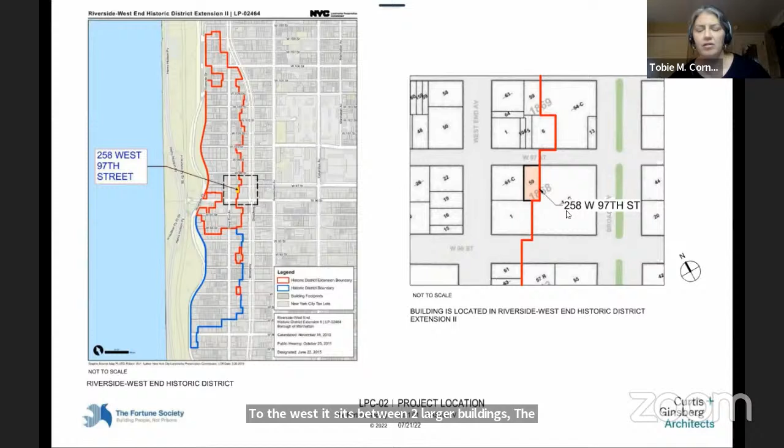The Old Paris Hotel is here, and on the right side there's a larger, newer building built in the 1980s that extends up to 24 stories. We looked at the original photos from the 1940s, and it was originally covered on the side—you can see it here on the left. By the 1980s, the newer building had been constructed, so now this left side of the building is exposed. There's a one-story parking garage to the left of it with a community garden on top. And you can see here, this facade in the back is one of the areas we're going to be talking about.

So there are 8 different things we're working on for the outside of the building, but 2 of them we're looking for your approval on. At the front of the building, we're looking to make an accessible entrance. The main entrance right now has 2 steps up to a landing, 3 more steps inside in a small vestibule. So we're looking to put a new accessible entrance off to the side that goes through one of the current window openings.

The other thing we want to do—if you can see here, there's a courtyard to the west of the building and a courtyard to the east of the building, and then we have a bulkhead on the top. On all of those surfaces, because we're looking to electrify the building, we want to improve the envelope and the thermal performance of the building. So we're looking for your approval to put insulation on the outside of the building using an EIFS system that has a full drainage board behind it.

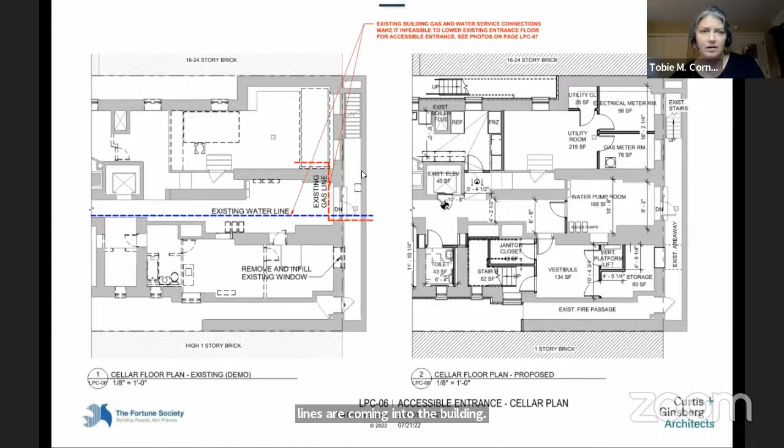Here you can see where the gas line and the water lines are coming into the building currently. So if we were to try to adjust that front entrance at the main entrance, we would have to relocate a lot of the main utility pipes here.

Here on the left, right now there's currently metal work—it's not the original historic metal work, it's an aluminum fence. We're proposing here on the right to cut a hole in the fence to build this bridge. There's a window opening here on the left that we're proposing to remove the window and extend the masonry opening down to the bridge, and to provide a new storefront door similar to the current storefront doors at the main entrance.

We would add new lighting that would match the painted stone that's here, so it would be unobtrusive. We'll maintain the lintels and the width of the opening, but try to do something pretty minimal. We're going to be studying the lighting to make sure it's unobtrusive at night as well as during the day. There's a post here on the right, and we'll be adding a push button so the door is operable.

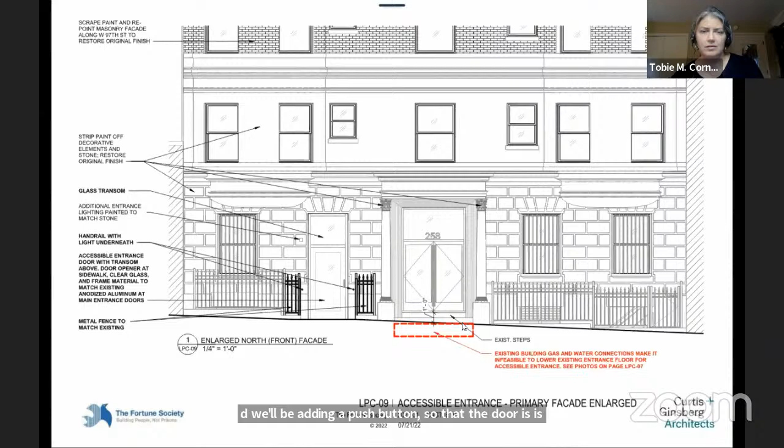On the next page, here you can see the existing areaway on the left, and we'll be bridging over using the same design for the fence as exists there now. Then we'll be filling in the masonry opening below. The bridge will be constructed out of a metal grating—this is a diagram of the grating, but it'll be a pretty fine grating so that it's walkable, but also allows the drainage to go down to the areaway below.

So this is the area that would get the work. And these are some elevations of the side courtyard. We're proposing this EIFS insulation here on the east side, all the way up.

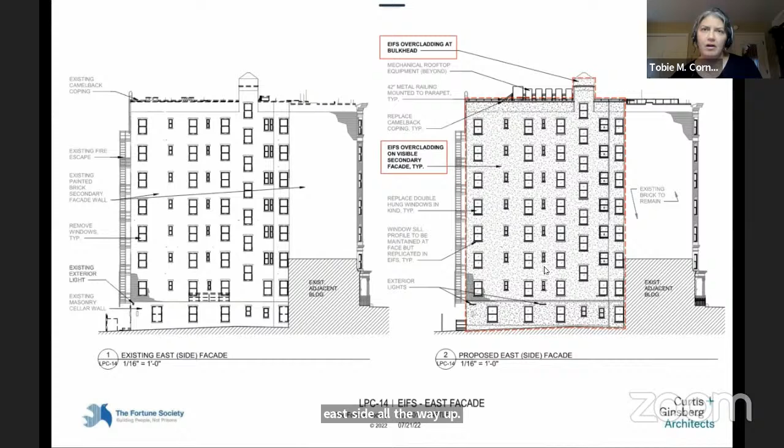We wanted to put it on the back as well, but we have a non-compliant rear yard, and we can't reduce the depth of the rear yard in it. Here you can see where we're proposing to put it, and it would be the same—a similar kind of cream color, uniform. We would move all the windows out so they would have the same distance back from the new face of the facade. We think the wall would read very similar to what it reads now, but it would perform a lot better because it would have insulation on it, and we'd maintain the projections for the sills.

So this is the other facade on the west side, doing the same thing. Here are some pictures of the existing conditions. This will be an opportunity for the building to really clean up a lot of these wires that are on the building—some are current, some are not. You can see here on the right, the sills project a tiny bit, and we'll be able to recreate that projection with the new finished material.

But you're not actually moving the windows? We will actually move the windows. The existing ones are back about one brick depth from the current facade, and what we'll do is bring the windows out as far as the current facade.

So they'll be back a tiny bit further than they are currently, and we'll be adding 4 inches of insulation outboard. So the insulation will add 4 inches to the wall, and it will have the same cream color as most secondary facades, as it allows a lot of reflected light to come back to nearby buildings. Is this a technique used when it's too expensive to go inside each individual unit and add insulation?

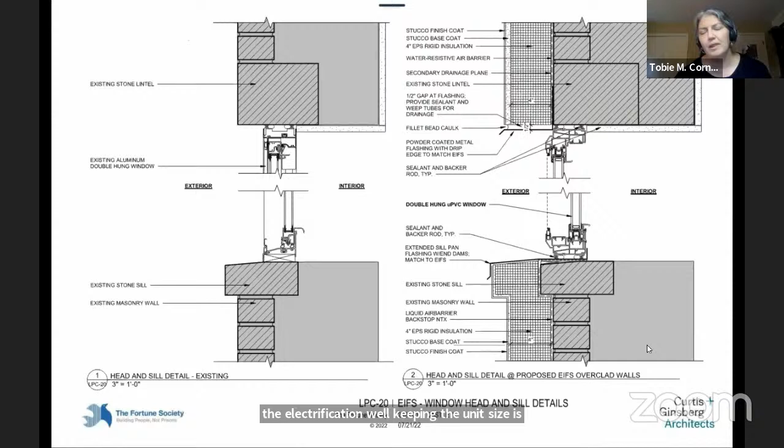There are some renovations that definitely put the insulation on the inside. It creates some challenges with condensation, and it has to be very carefully calibrated to get the vapor barriers and air barriers to work. But it's certainly possible—in this case we can't do it because of the size of the units. Jay, did you have a question about this?

Okay, so these are just a couple other pictures. This is looking down on the window. We're working with a couple of window manufacturers now, working on this joint, so we may have to reduce the size of the masonry opening a little bit. The old historical design had a pretty heavy brick mold, but I think the glass will still be the same, and the reading of the window will still look right.

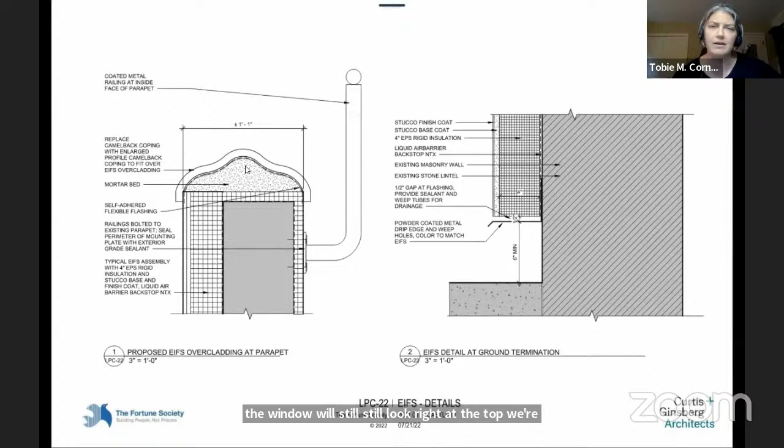At the top, we're going to bring the EIFS all the way up, so we'll be widening the camelback coping that's already there. We'll put on a new one, but it will be wider to encapsulate the insulation on the outside and inside of the parapet. And then we'll be adding a code compliant hand railing at the top.

Some things here, like the railing, are part of staff review rather than the community board, but that's one element of the project. Up here is the existing bulkhead—it won't be red, it'll be cream. On the left we're outlining where the future mechanical equipment will go. For the full commission presentation, we'll have sightline analysis of the mechanical equipment, and these are just some specifications of the EIFS.

Thank you for having us this late on this night, I'm happy to answer any questions. Great, I see Mark, do you have a question? A question and a comment or two.

Looking forward to this project and its implementation. The question is, if I'm understanding correctly, there'll be a bridge across the areaway leading to an alternate vestibule that will in turn have some manner of lift in it—is that how it's working? Yes. Okay, so that in my view is preferable to the necessary but not as appealing solution we had on 79th Street, where they also cut a window into a doorway for the Project Find process. I think this is an appropriate, if not elegant, solution, and I support it.

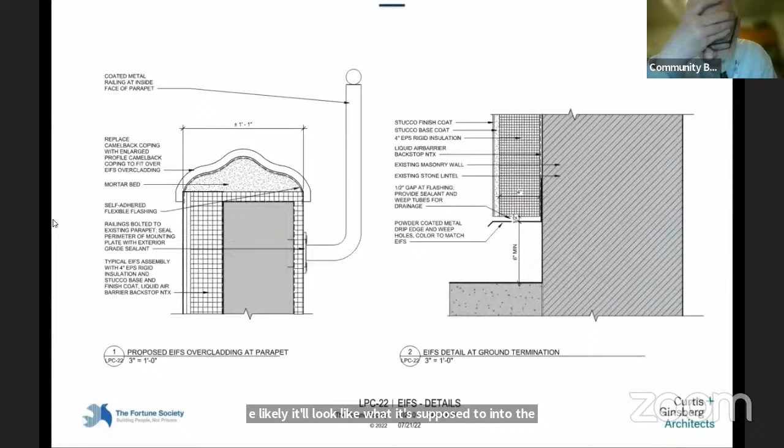If I were to recommend, the grayer or darker you make it, the more likely it'll look like what it's supposed to into the future. And then the question I have, and I'm sure you've looked at this—I remember our board was called upon to vote, and did vote in support of, zoning amendments to the zoning resolution that allowed the application without increasing FAR or the degree of non-compliance, by allowing a building to add insulation on the exterior and on the roof, especially in circumstances like this where it's not practically feasible to do so from the inside, and not to have it increase the level of non-compliance.

I assume you've looked at that, but it strikes me that this is exactly what they were talking about with city planning. We have looked at it. There's some multiple dwelling law issues too, with livable light and air windows and distance from the lot line.

I agree, it seems like we should be able to run the EIFS around the back of the building. We haven't gotten to the point of putting it on yet, but we did look, and at least to the letter of the regulations we've reviewed, it's not possible. But it's certainly something the project would be happy to do if we could find a way to make it possible.

And the last question is whether the storefront door that will occupy the new opening will match more or less the storefront. I don't want to cause the project to have an increased budget. The current doors are not enviable, but as long as they match, I suppose it'll be okay.

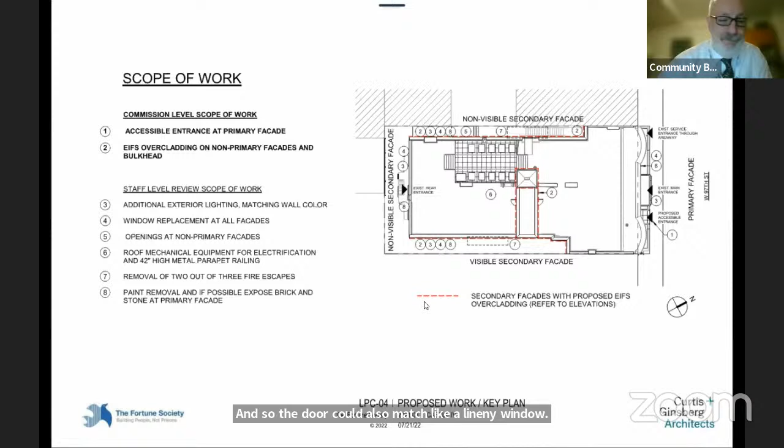Okay, all right, thank you. Other questions?

Paige? And then quickly, Jack. Oh, sorry, go ahead. No, go ahead, Paige.

Very quickly, so the EIFS is going on the visible secondary facade, not on the back, but on the non-visible, correct? Correct. I'm trying to figure out, yeah, it's going up here where it's really not visible except to the residents in this adjacent building. And then here where it is a little bit more visible - at least this part of it here, you can see diagonally from across the street.

My only concern is I'm an Upper West Sider, and we have a wall that's constantly being repaired. It's about 8 feet high and contains a playground, and the same EIFS is applied, but it gets gouged - people carve their initials in it, drug dealers make pockets and put drugs in it. And the building is so pristine - isn't there a way, given that not all the walls are going to be EIFS, that you would consider pointing the brick and making proper openings? Because I think once your facade is up, the EIFS does nothing to support the beauty of this little building. I'm going to support the project, but I do think the EIFS is not appropriate on the side of a historic building like this.

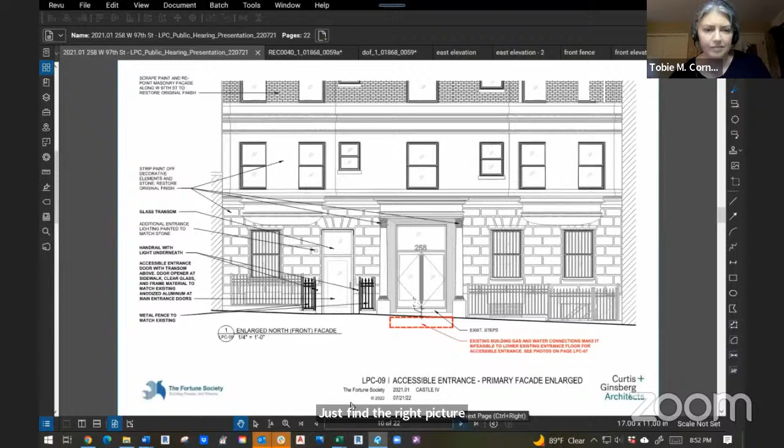Yeah, that'll do. So...

Mark mentioned, I wouldn't call it an objection, but something might be done better with the new door, matching the existing storefront doors. My question is, looking at the front of this facade with the existing railings, gate, and metalwork on the windows, it seemed to me it would be far more aesthetically correct and appropriate if that new door mimicked the windows and railing rather than the storefront doors.

We can certainly look at that. There's a building on the Upper East Side, I forget the name of it, but it has beautiful ironwork over the storefront.

Well, are you willing to commit to doing that? We can't commit to doing it. This is a severely budget constrained project. But it's certainly something that if we can do it, it's something we would like to do. We could come back and show you what that looked like, before we did it.

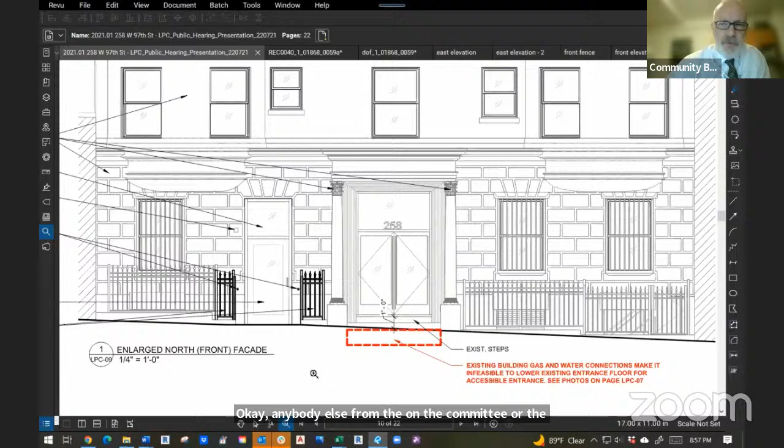Anybody else from the committee or the community board with a question? There's one person from the community with his hand up. Shall I promote? Yes, please.

All right, Mr. Filler, you should be able to unmute yourself. Maybe you could stop screen sharing so we can see him. Okay, Mr. Filler, you're here. Would you like to unmute and share something with us? Going once. Perhaps he's gone off to watch the hearings. Okay, he unmuted—no, he didn't. Okay, well, if he comes back.

Meanwhile, Michele, anybody else want to share anything? Robert, you got anything you want to offer? No, I think it's quite a brilliant solution, and especially the add-on that Jay added to the door, the features added to the door, just adds to a very good plan.

Great, okay, thank you. So we'll take a vote on this. We have Madge gone, Peter's gone, Susan's gone. Clary? Yes. Mark? Yes. Paige? Yes, and greatly well done. Thank you. Jay? Yes. And I'm a yes. Kay? I'm with Paige on the greatly well done.